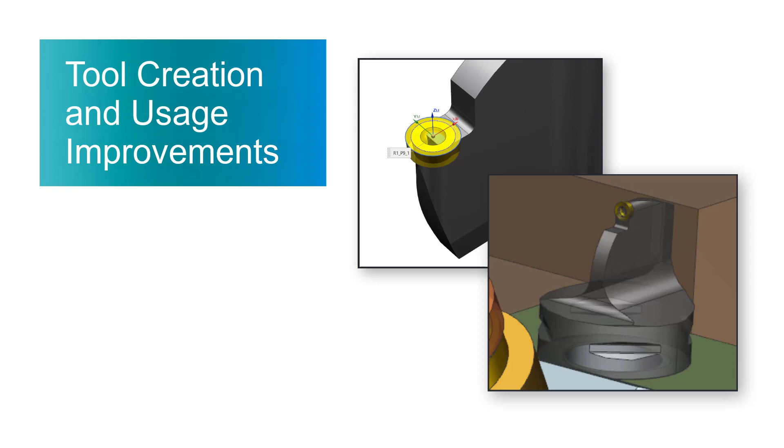Multiple enhancements have been made to tool handling in the context of the machine tool, reducing manual interaction and making tool handling easier and more intuitive. These enhancements include simplifying the 3D assembly tool creation workflow, allowing changes on origin tool parameters only, overall improved usability of tools in the machine context, and adding a quick open option for the tool, device, and machine tool.

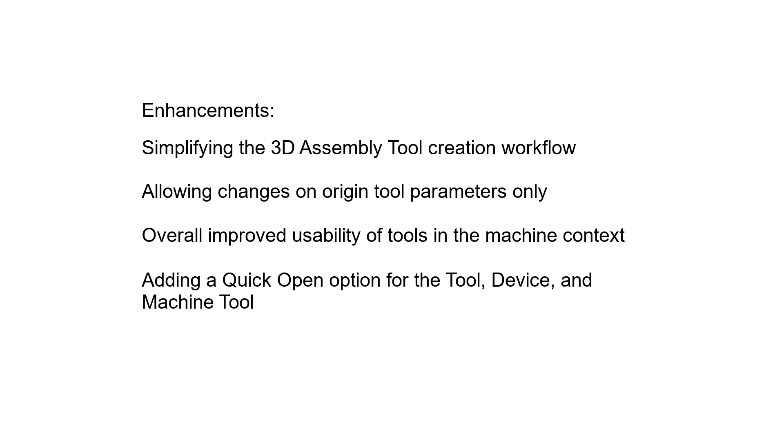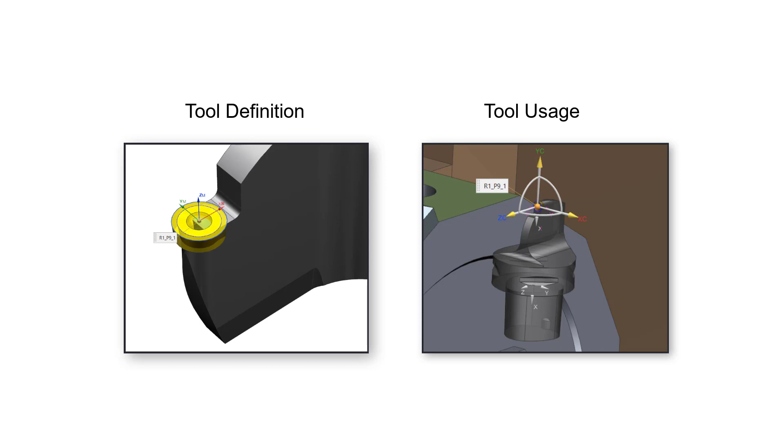There are two main stages when applying tools in NXCAM. Tool definition, where you create the parametric or 3D assembly tool, and tool usage, where you use the tool in the CAM setup or create a parametric tool within the setup. This video will step you through the workflow of both tool definition and usage.

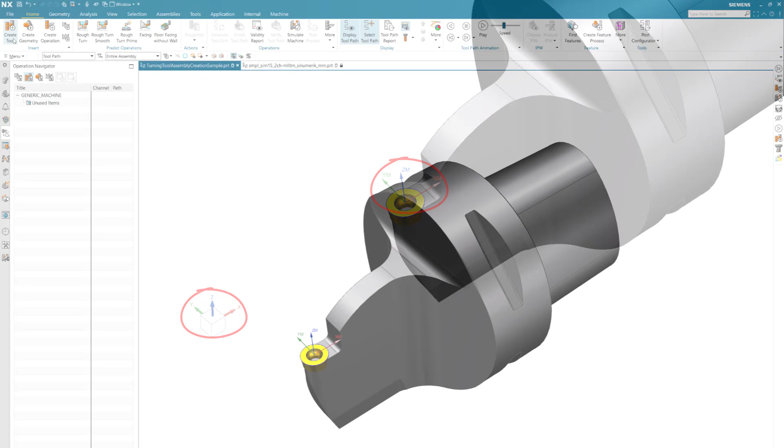In this example, the displayed tool is a generic assembly from a tool vendor which we wish to prepare and export to the NXCAM tool library for later use in a CAM setup. It has been oriented correctly in the World Coordinate System, and the WCS has been specified as the tool center point position. We'll begin by selecting Create Tool.

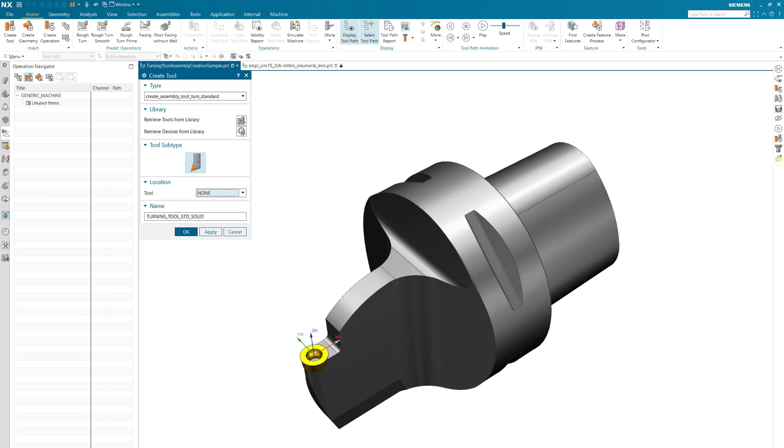The Best Practice Library Turning Tool Creation resource on PostHub contains two templates which support the user to create solid or parametric turning tools for the library. The templates are available for standard tools only. Templates for grooving or threading tools are not yet available. In this case, we'll create a 3D solid assembly tool. The new Tool Definition dialog displays.

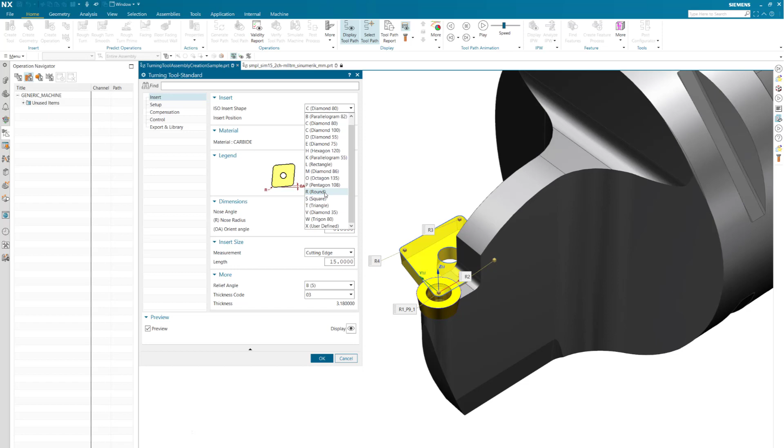The tree on the left guides you through the process of creating a tool as you work from top to bottom. We'll start by specifying the tool parameters for a 3D button tool. In this case, we'll select the round insert and adjust the dimensions. We'll specify the setup information by defining the junction for the mounting and tool tip, as well as specifying the cutting portion of the tool.

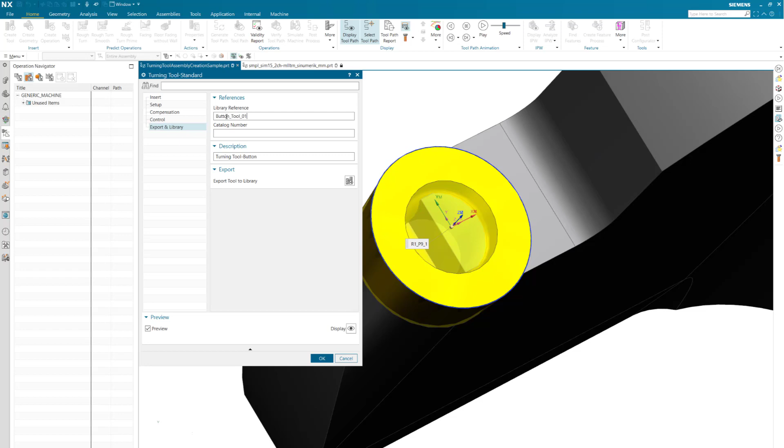You can also specify a color for the tool if necessary, and compensation settings to determine the tracking point. Control options determine the tool number, manual change, and limits. Lastly, we'll enter a library reference and export the tool to the NXCAM tool library. The system notifies you when the tool has been successfully exported to the library. Now we'll see what is improved when the tool is used in the setup.

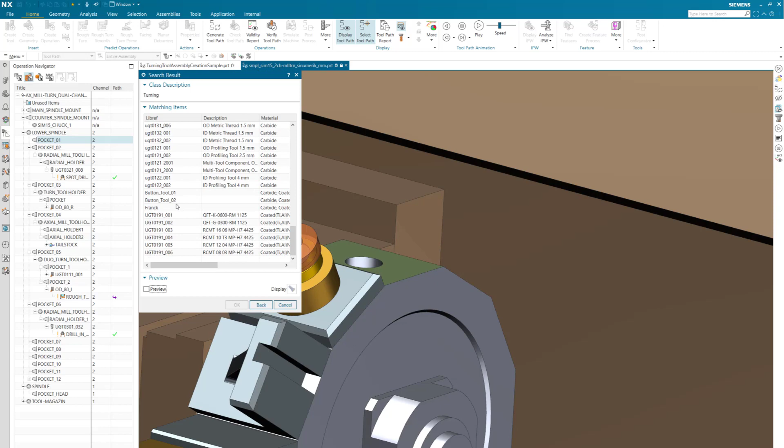When editing the assembly tool from the library, notice that most of the tool parameters are grayed out. Only the original tool part file should be edited. The tool cannot and should not be edited from within the setup. The export option has been removed because tools should only be exported separately. This avoids miscreation of library tools. Parameters without library references may be customized.

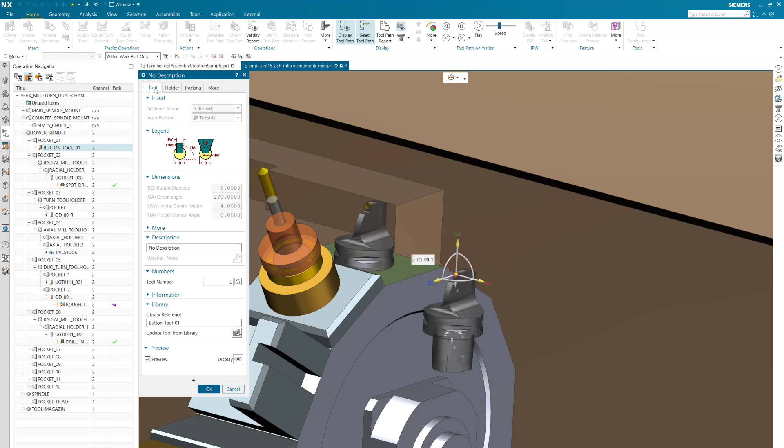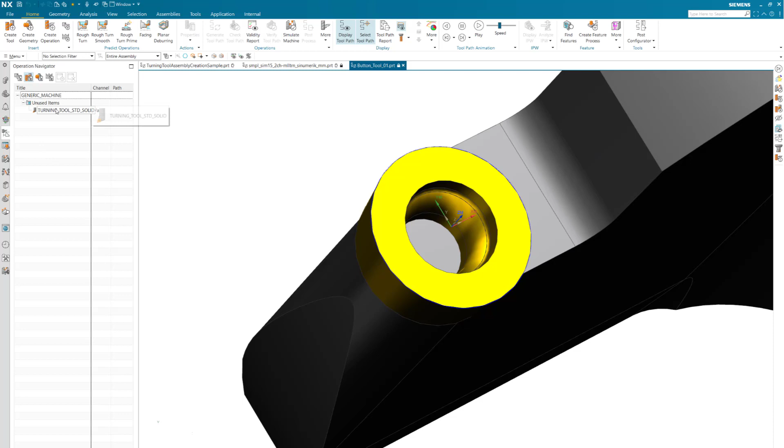The new Open in Window option is a convenient way to quickly open assembly objects in CAM. It is available for tool assemblies, device assemblies, and machine assemblies. Using the new Quick Open option opens the underlying assembly part file quickly, eliminating the need to manually search for the component in the Assembly Navigator or for the tool in the Operation Navigator tree or on the disk.

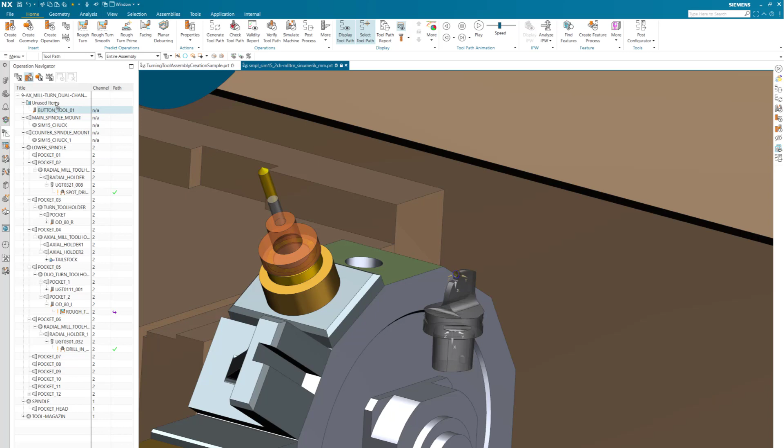A new message displays when a parameter is changed, alerting you that the change will break the link to the tool library. In cases where you do not have access to the original tool part file, moving the tool to unused items will unlock the tool parameters, allowing you to change the original tool parameters but resulting in a broken library link. The same message is displayed as before.

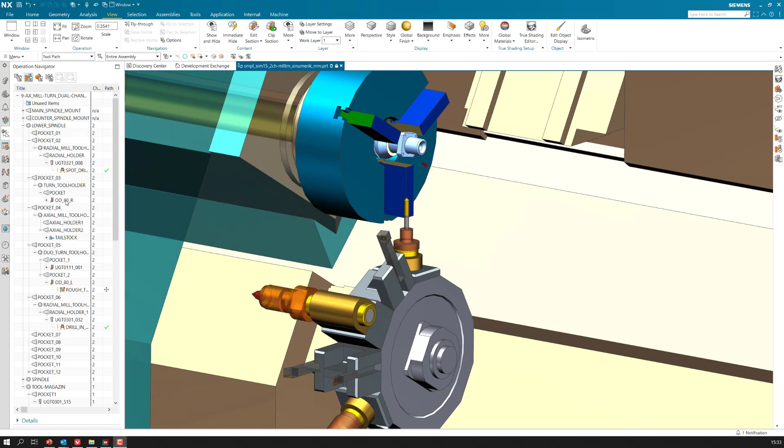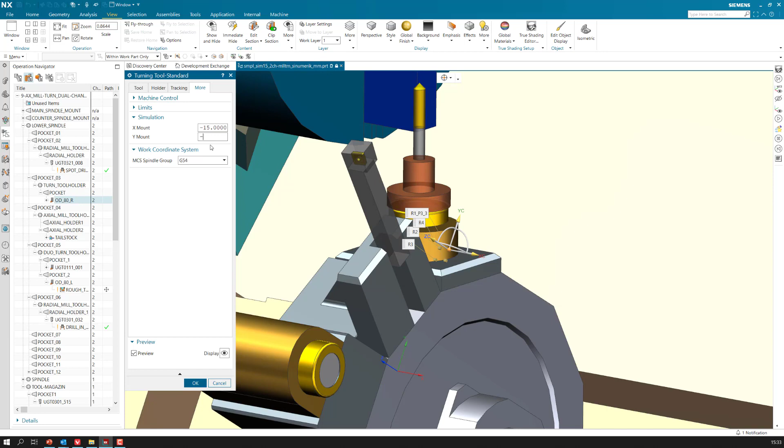Additional improvements have been made to make the positioning of parametric tools more user-friendly and intuitive. First, parametric tools are displayed in their mounting position when displaying the Tool Edit dialog. Second, adjusting the XY mounting position will display the position immediately. And third, the mounting junction of a parametric tool is now shown, displaying a reference of the XY mounting values.